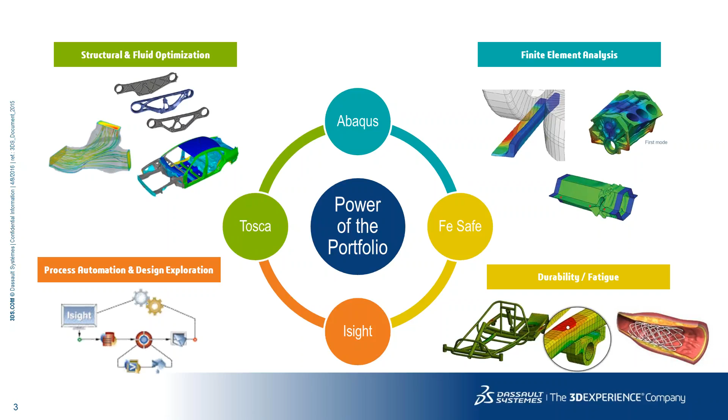Tosca is a non-parametric tool, whereas Isight is a parametric tool used for design of experiments or optimization. Next I'll go into the workflow where you can use all these products in combination with each other.

The way the project is designed: first, stent analysis is performed in our flagship product, Abaqus. Once we have the initial stress results, we start looking into parametric design optimization using Isight.

Where we can change the parameters. The known parameters are length, radiuses, thicknesses, and so on. We can change them, and then once that is performed, the next step is to go into fatigue life, because whatever product we design or analyze, we want to make sure it has enough life in it, like hours, years, or maybe seconds, loads, or cycles.

That can be developed using Fe-Safe, and then eventually taking the same stent to the next level, doing local optimization using a product called Tosca. So far I've talked about Abaqus, Isight, Fe-Safe, and Tosca.

We also want to make sure that once we've designed our stent and it's good enough, we can take it to the next level or into production, where we can do reliability analysis using Isight. This is all a very broad overview - I'm not going to get into the nuts and bolts or details, but just to show you how things work, and then eventually we can look into particular products like Abaqus.

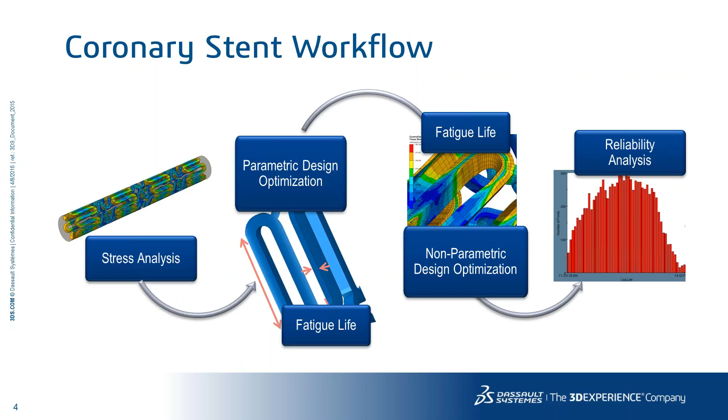Stent deployment analysis: as we all must be doing, if you're using Pro Mechanica, you'll be doing some sort of stress analysis, maybe static, or dynamic, linear or nonlinear, depending on requirements. Here we're doing crimping and insertion analysis using Abaqus.

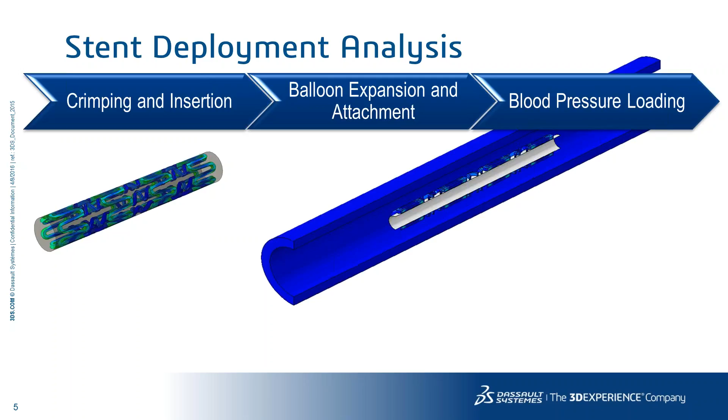Then taking it to the next level where we put it into the artery. First crimping it, then expanding the same stent into the artery, and eventually loading it with blood pressure, basically ballooning it. This is all using Abaqus.

We've performed the crimping and insertion analysis into the stent, and then life can be influenced well by a small shape change in it. That can be performed using Tosca.

Extending with global design changes, which we will go into changing with the Isight parameters, where we change the radiuses and length, and then eventually run the cyclic stress or fatigue life, or any durability analysis using the Fe-Safe code.

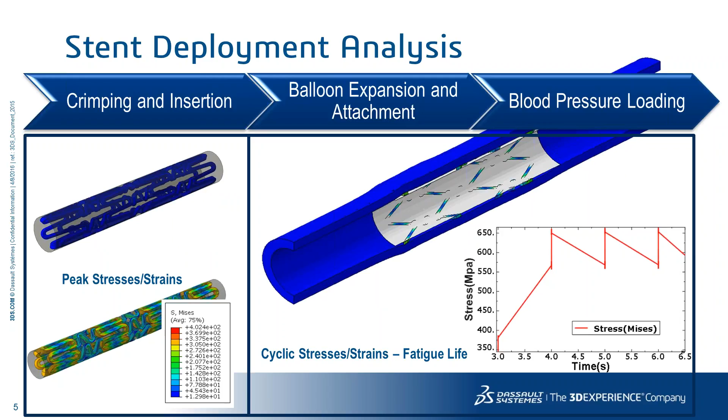Once we did the life cycle analysis, which can be done at any state of the analysis - we can go into the crimping or we can go into the expansion - that is where we can design that.

Now going into the parametric aspect of it. You must have used some kind of parametric study whenever you design a part - what if I change the radius, or what if I change the length? Will I get better performance, or will I get worse performance?

So we've all done the iterative study or trial and error study, which can be made into an automated process using Isight. Control via geometric parameters using SolidWorks.

In this particular case, the part is designed using SolidWorks, so changes on the mesh are transferred with the help of a script, if you're using any scripting. The workflow here: start with the parametric 2D model, bring that model into Abaqus CAE, mesh it, and then simply extrude it, because this is a simple extrusion part - extrude it, make it 3D, make it a cylinder form, and eventually run the analysis.

For this particular stent analysis, there are three parameters that can be investigated: first is length, second is thickness, and third is radius. First we can set up a design of experiment using Isight, and that will automatically modify any of the parameters.

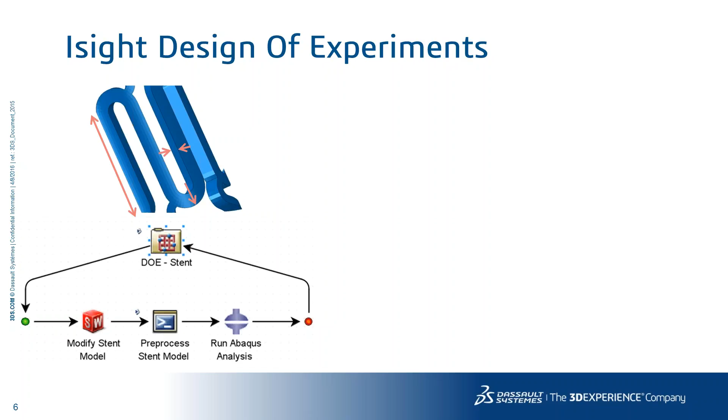In other words, we'd be doing one study, running the analysis manually, finding the results, then going into the next analysis, maybe putting an Excel sheet together saying these are my high stresses, these are my high strains or displacements, whatever variable we're looking at. That's a tedious, iterative process, but with Isight you can automate everything, and that's where process automation comes into play.

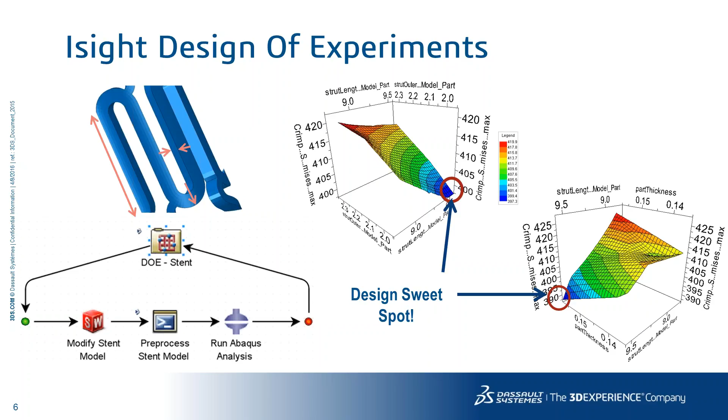Eventually my goal is to reduce the stresses. That's where the sweet spot comes into it, including all the parameters, and that's where Isight guides us into the right direction. This was more of a global approach going into the Isight design exploration.

Now I can go ahead and make some very local changes using shape optimization with Tosca. So far I showed you the capability of Abaqus where we did the crimping or expansion analysis, then the life cycle analysis using FE-SAFE for fatigue and durability, then the parametric study for the global model where we changed all the parameters in the part, and that's where we found the best possible solution.

Now I want to take it to the next level, where I can still reduce my stresses by going into stress homogenization and peak reduction.

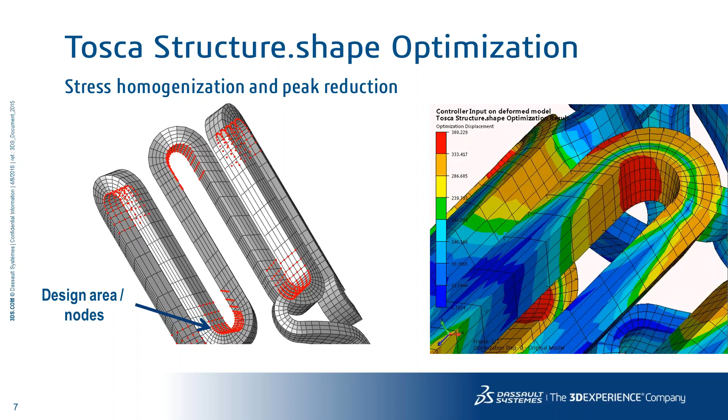The best part about Tosca is you can put geometric restrictions, because sometimes it will come up with a design which cannot be manufacturable. So you can put restrictions into it as well, and you can also put cyclic symmetry.

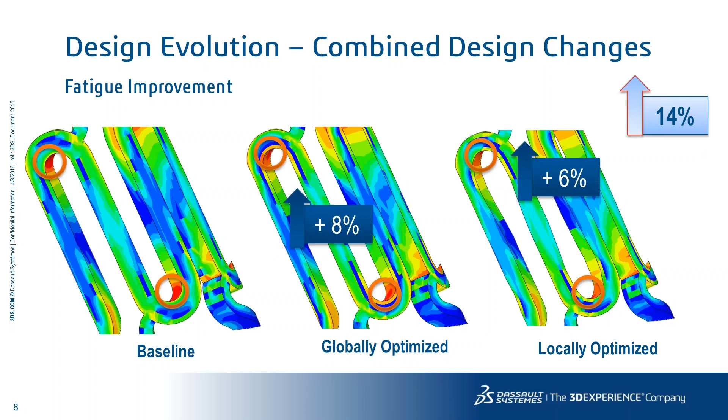I just showed you a very high-level analysis aspect of it. What I'm going to do now is go into the nuts and bolts of Abaqus analysis, because that's the whole purpose of this webinar - to show you the capabilities of what Abaqus can do. Those are limitless capabilities, and the industries using it - any industry you can imagine - Abaqus is being used nowadays.

So I'm going to start with Abaqus and what you can do. As you remember from the first slide, it talked about realistic simulation. So what is realistic simulation? It's nothing but a simulation that can be physically realistic and lifelike. I've worked in the industry for about 15 plus years, and the sophistication it has come across with contact, material definition, and all sorts of loading capabilities and analysis procedures - it's a tremendous change.

So all companies are moving in the direction of virtual validation, and you must have heard that, because Honda is a great example - going from a product life cycle of 5 to 6 years, just taking that as a number, nothing solid, but maybe reducing it by months. So that's where every company is going - not to eliminate physical testing, but at least reduce the possibility of it.

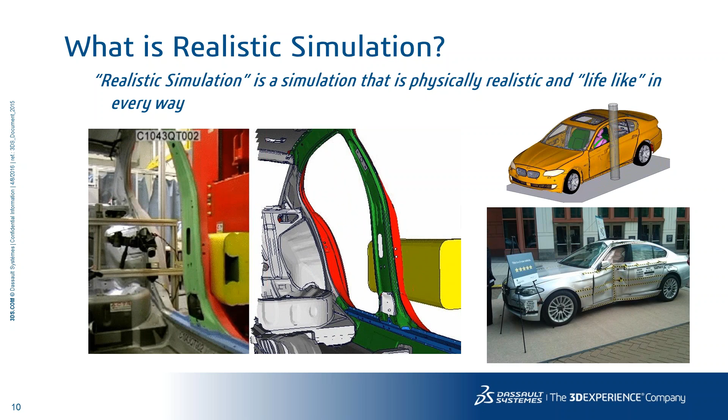Here is another one: to reduce the physical testing, because as I mentioned, every time a prototype can cost you tons of money. So to reduce physical testing, save time and money in the product life cycle, and eventually improve the quality.

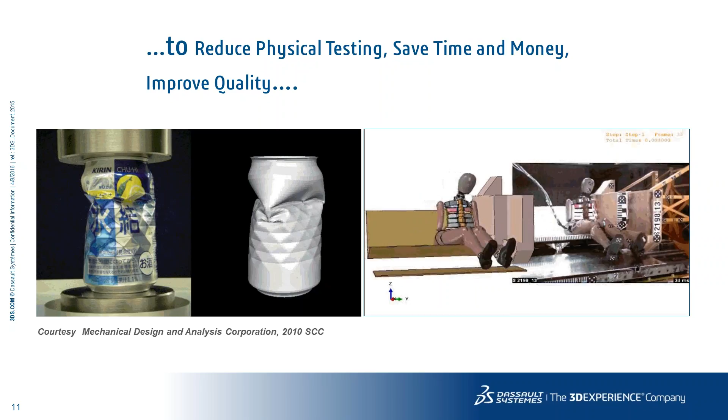Another example is the dummy for the side impact analysis, and that compares very well too. So these are, as I mentioned, kind of a proven process in the industry where they have eliminated the prototype phase and gone directly into production.

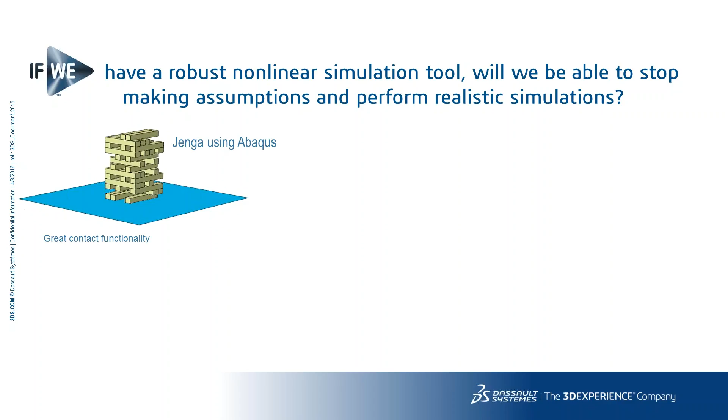So here is the first one, known to every household: Jenga using Abaqus. It's a great demonstration of contact functionality.

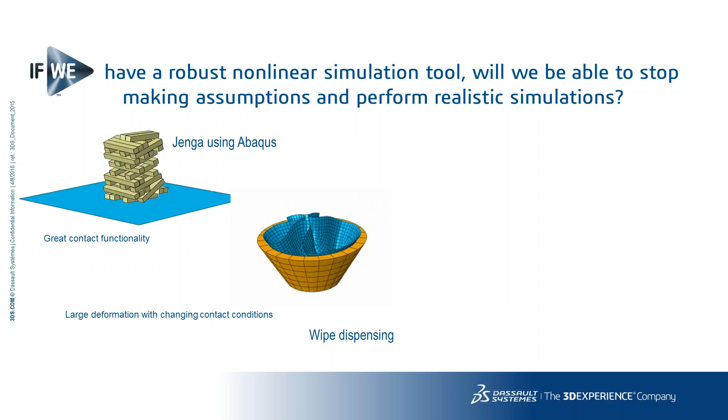Then here is another one we've all used at one point in time: the wipe dispensing for our Kleenex or any Lysol wipes. This shows how the contact state changes as the wipe is being pulled out of the container.

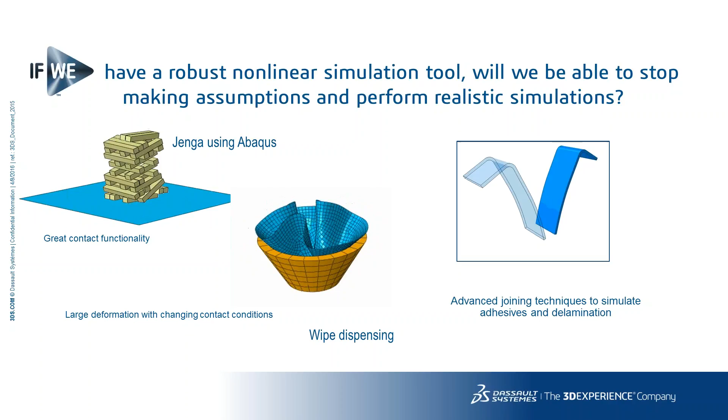And then here is the delamination, or finding the adhesive or cracking in part of it. This is the VCCT, or virtual crack closure technique, in the Abaqus software.

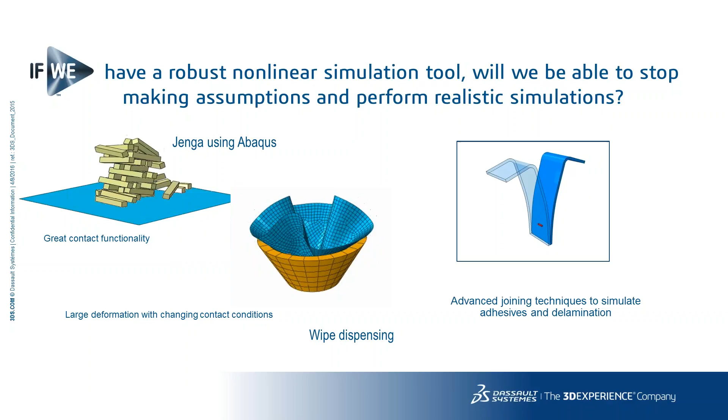So these are some advanced capabilities available within Abaqus. You might not be using them nowadays, but eventually you can take it to the next level and use them.

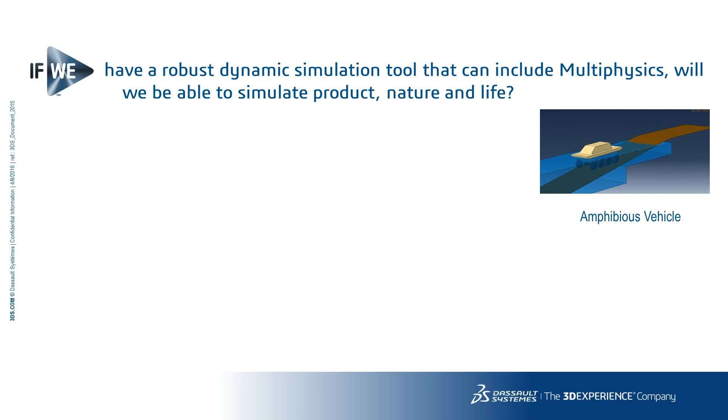So that is where the vehicle here is kind of a duck boat tour, which we might have seen at any tourist place, like Wisconsin Dells or Boston, anywhere. So that's on the road, and eventually getting into the water, and analysis has been performed on it.

And here is the Heart Project. Simulia is very much into it, and right now we have a Living Heart Project. So if you want to see a very cool simulation, you can Google Living Heart Project, Simulia Abaqus, and that way you'll be able to see all the details of it.

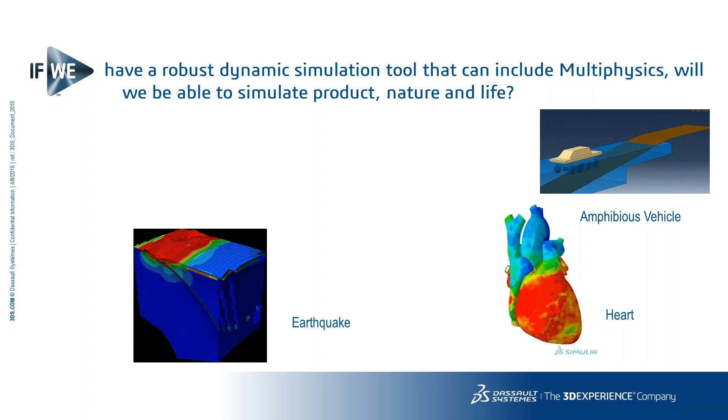And then earthquake simulation. This is a better one, like a hose with fluid, using our SPH, or smooth particle hydrodynamics, simulation capability within the Abaqus tool.

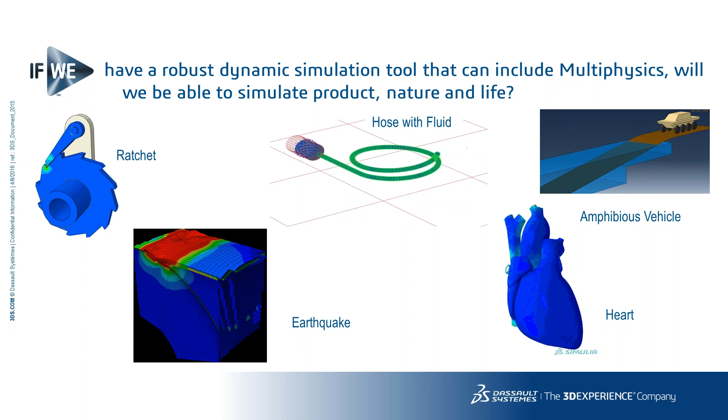So that's showing that. And then here is a simple ratchet mechanism where it stops, and high stresses and high strains are generated, eventually causing permanent deformation. That's where the tooth fails.

Here is a clip insertion analysis, more of a bushing simulation. And then the stent we just saw, taking it to the next level where we saw the delamination or adhesive properties. This is a great example from the aerospace industry.

That's where the skins, stringers, and longerons are all simulated, and that's the good old flagship simulation. If you go to any Abaqus demo, that's the first simulation, and that's where the explicit analysis started, with the Motorola phone drop simulation.

And this has expert capabilities within it, using the CEL, or the combined Eulerian and Lagrangian capabilities, or the coupled thermal mechanical analysis, and composite delamination technology. So these are the various simulations that can be performed.

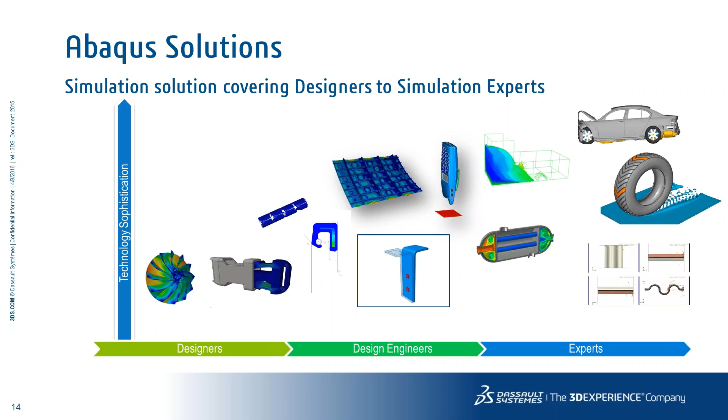So that's enough with the animations and videos of Abaqus capabilities. Now I'm going to talk about what industries it's being used in, and tell you a little more about Abaqus, the solvers and the products.

Now I'm going to get into the details of the Abaqus products. Abaqus comes with Abaqus Standard, which is our implicit solver. Then we have the explicit solver, and computational fluid dynamics, which is CFD. It's mostly nonlinear engineering capabilities designed for production use. The mathematical basis is the finite element method, with years of experience behind it, which is why it's an industry standard.

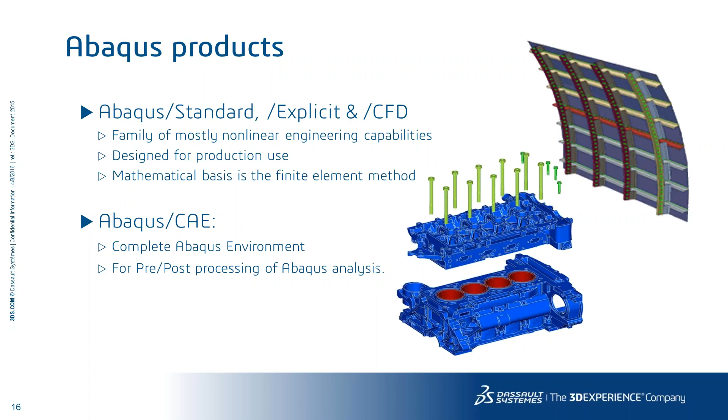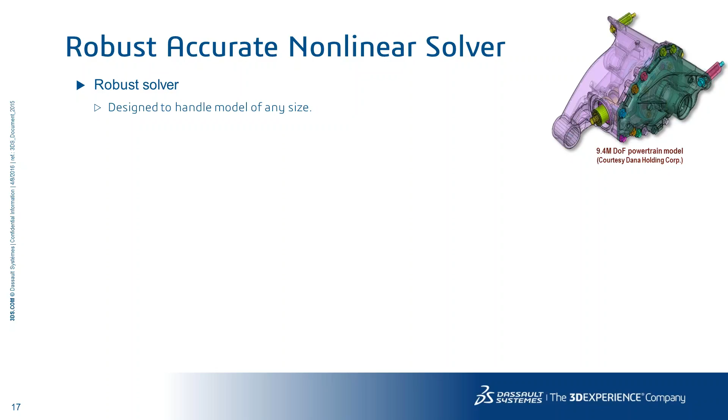Here's a simple example from Dana Holding Corporation: a 9.4 million degree of freedom model, which is huge. It would take 3 days if run on 4 cores, but running the same model using 128 cores, the solve time was about 4 hours rather than 3 days. So you can see it marches to the solution faster and scales efficiently when using multiple cores.

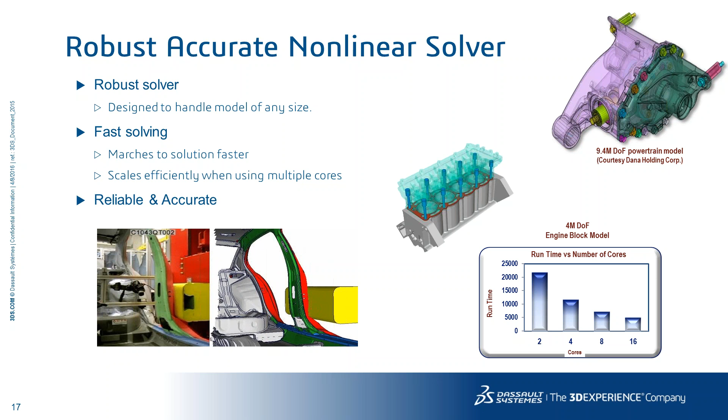Here's a 4 million degree of freedom model, where runtime with 2 CPUs versus 16 CPUs was almost a quarter. As we saw with the impact analysis, that's the scalability portion of it—more CPUs get you results faster. It scales pretty well with respect to the resources and tokens you have.

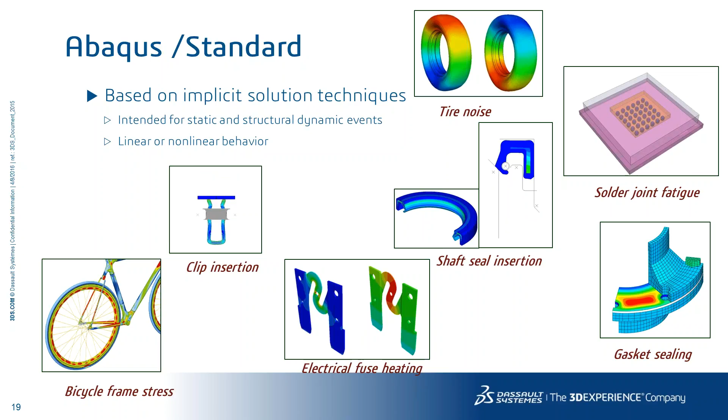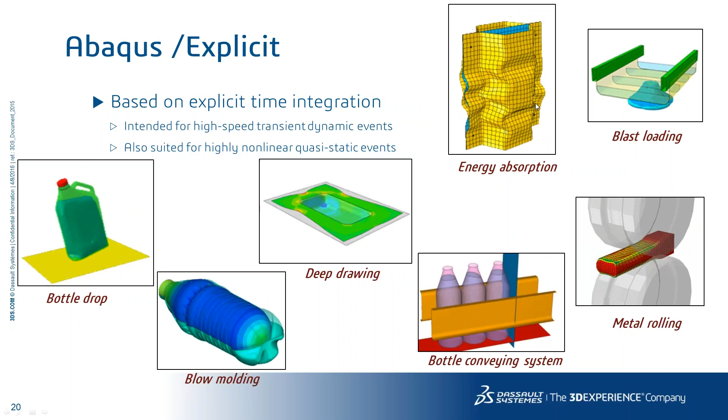And then explicit, that is where you can take it to the next level where high-speed transient dynamics is an area of interest. It's also suited for highly nonlinear quasi-static events. So if you're doing a bottle drop analysis, this also takes into account fluid structure interaction, or FSI, then blow molding, deep drawing, energy absorption like the previous crumpling of the beam, blast loading, metal rolling. These are just a few examples, and you can also use it for contact simulation, which is extremely robust and accurate as well.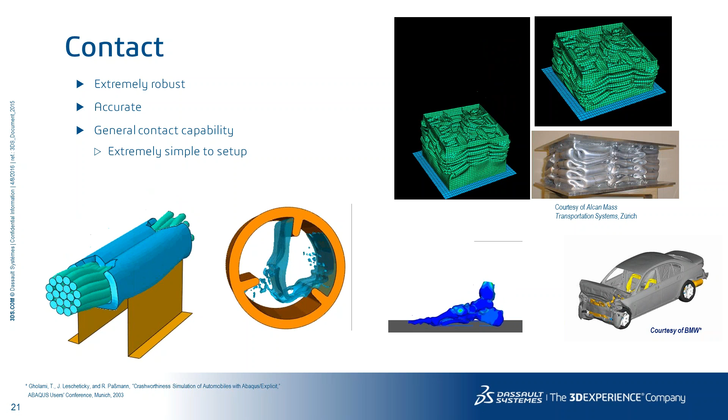So just to sum it up, Abaqus does a great job with the nonlinear models, or if you just have a basic analysis, where I'm going to show you the demo of it into the beam simulation, but contact is now the area of interest.

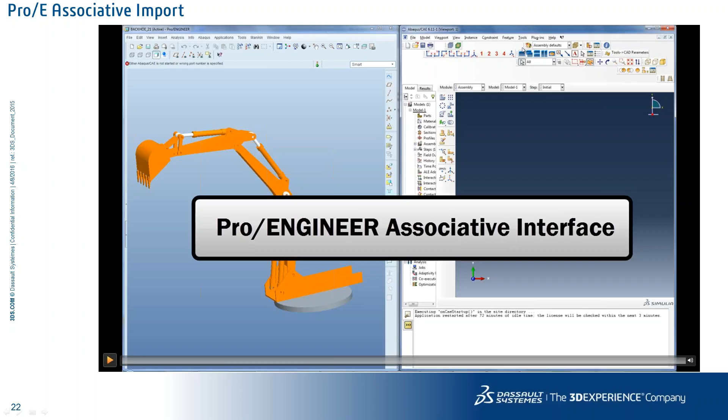So I'm going to show you the associative interface import with Abaqus. Here is my Abaqus CAE and here is my ProE, and I'm going to show you the associative import into it. First of all, to start with, I have to make a connection with my CAD interface. In this case, I'm making a connection with my ProEngineer.

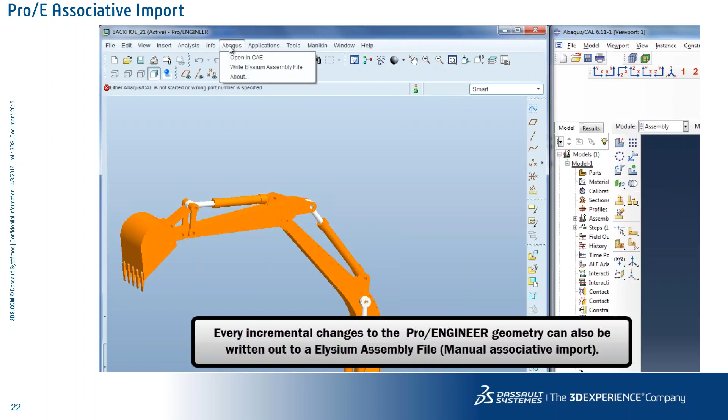So that way, ProEngineer associative interface offers two import methods: one is automatic, the other is manual. Automatic is open in CAE, and manual is exporting with the Elysium assembly file. Every incremental change in ProE can also be written to the Elysium assembly file, or manual associative import.

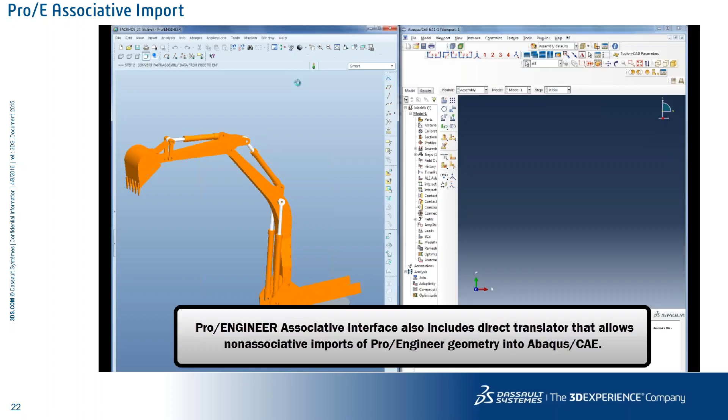So now in this case, I want to do the automatic, so I'm going to be exporting that to Abaqus. What do I want to export? The solids and points and everything, and what units do I want to write into it. So now I have all the details, how many solids I'm importing or how many points I'm importing, and then putting that into Abaqus CAE.

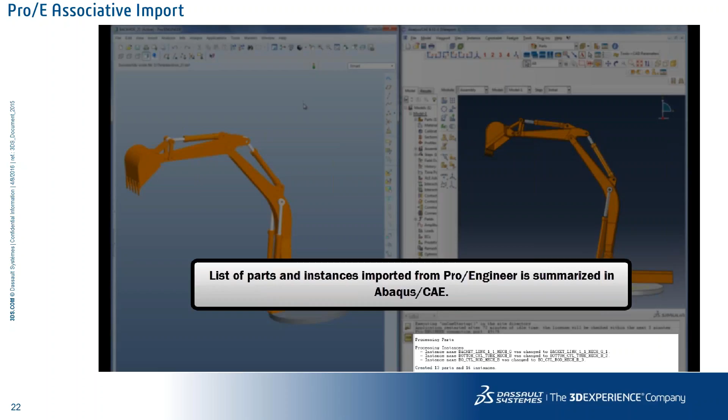The only criteria is that you have to have both the GUIs open, so you can see how simple it is. I brought it in, and now I have all the part instances into the assembly the same way as I defined in ProE. The naming convention stays the same, and I can also do view manipulation, because pan, zoom, rotate is not the same with ProE, since it does go with CATIA.

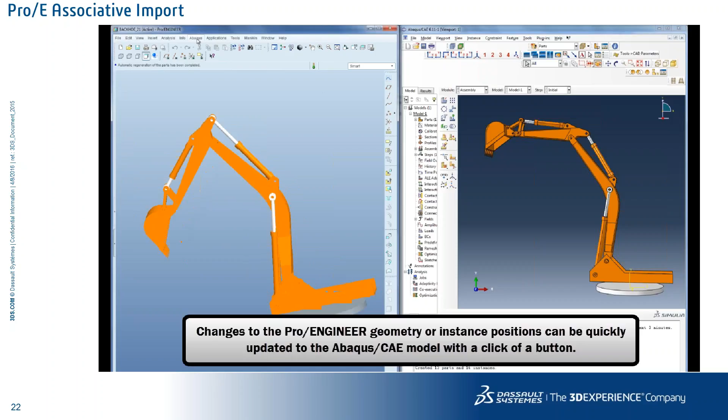Now I want to make some changes in the ProE aspect, so you can just see on the fly I moved my backhoe. Now if I update the model, the only other thing to keep in mind is every time you make a change, you need to open that into CAE again, and everything will be replicated the way it is in your ProE model.

So now I'm going to be creating a step where I want to perform a static structural analysis, or linear analysis. I'll perform that and create some kind of sets, loadings, and boundary conditions, and that will still be retained even if I made changes. So I created a step within Abaqus CAE, and then I'm going to go ahead and create a loading onto the side face with the pressure loading.

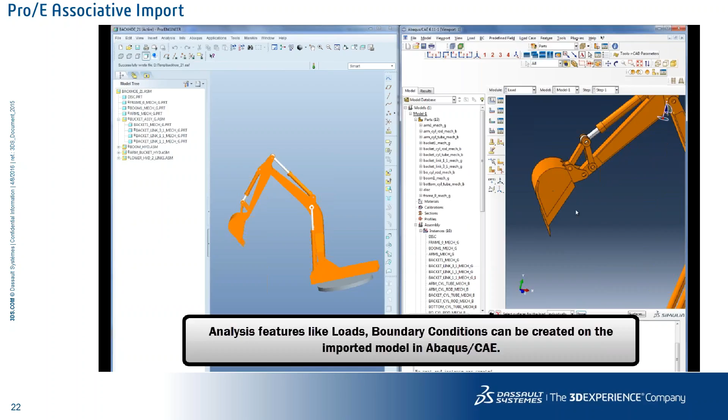So that all can be created in here. I created a pressure loading, and then I'm going to create a surface and a set because I want to apply some kind of a boundary condition. So I'm going to create a set with this surface, using one of the curvature surfaces.

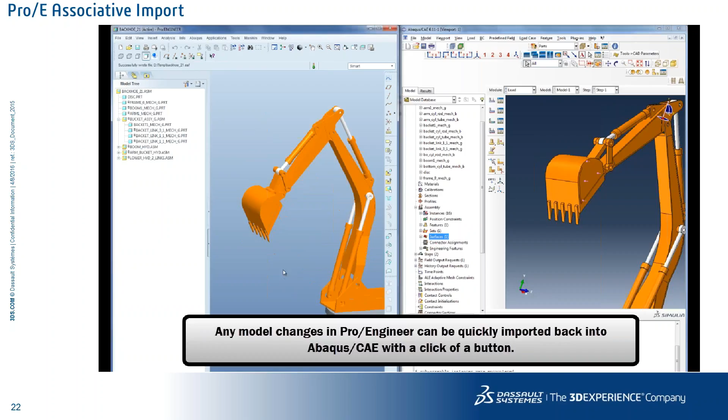So now I want to take it to the next level. I was like, whatever design I have for my backhoe, I want to change it. I want to change the dimension. So I changed the part dimensions or the parameters.

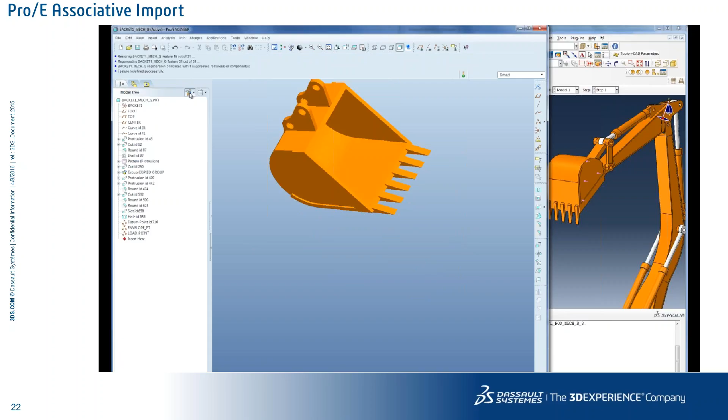So just wait for it, but you'll see the wonders. The same change is being implemented into your Abaqus CAE as soon as you open that again into the CAE. And I have some suppressed feature into the part, which was the hole I created beforehand. That is also defined into it. So now I go back to my assembly into Pro E.

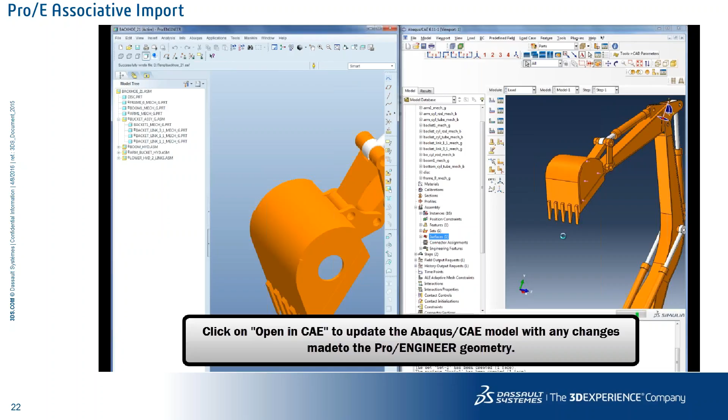So those changes are implemented, but I still don't see it. So I need to go into the Open in CAE. That way the changes are implemented. So you can see that my backhoe became smaller, and also there is a hole onto it. But wait until you see the loads which were defined on the surface, they still remain intact.

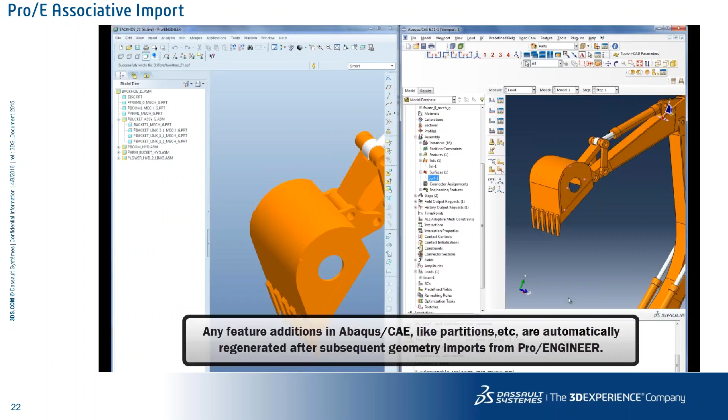So in a way, when you want to make some changes into Pro E, this is kind of an added capability. You have to have a license for the associative interface. But I just wanted to show you, because the way you make changes into your Pro E or into your Abaqus, those get replicated into your Abaqus CAE model. Because most of the time for us analysts or design engineers, what happens is you make some changes and you have to go ahead and recreate that model because that change isn't implemented into the current model.

And the same way, the SolidWorks associative interface is also available, which can work in pretty much the same aspect as well. So I just wanted to show you that, because as I heard, some of the Pro E design engineers are also going to be part of this webinar.

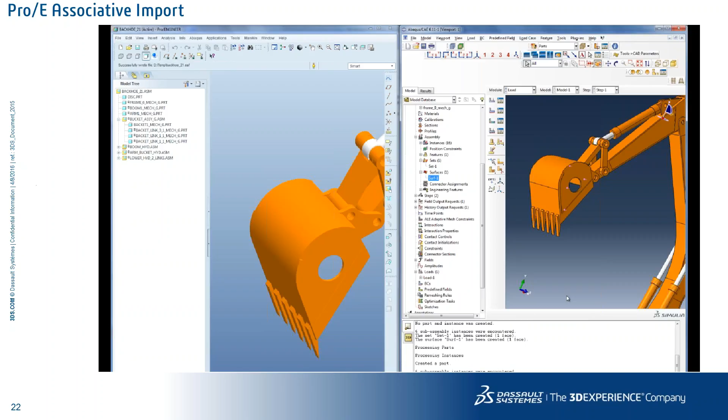And now I'm going to take it to the Power of the Portfolio, or the other tools which can be used in conjunction with Abaqus CAE.

So Tosca is a known tool for non-parametric optimization. And within Tosca, there are various modules available. The first one, and the most used, is the topology module, because every time you work on a part you ask: how can I make this part lighter?

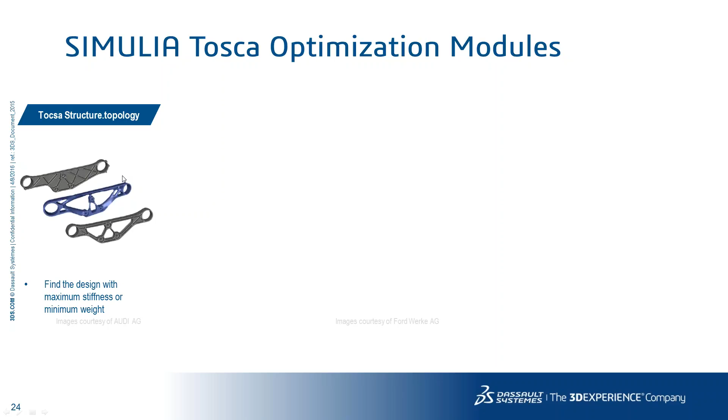How can I make it cheaper? Because material savings is your cost savings eventually. So you find the design with the maximum stiffness or minimum weight, so you're not compromising on the quality of your part, but at least you're getting minimum weight.

Then the second module within Tosca is sizing, where you can reduce the mass through optimized sheet thicknesses or sheet metal thicknesses. So as the name says, sizing works for shell or sheet metal components.

Then there is shape optimization. This comes into the later part of the design. Shape optimization doesn't help you with a whole lot of material or cost savings, but it does help you big time with local stress reduction, or in other words, hotspots or high stresses. So that can be reduced.

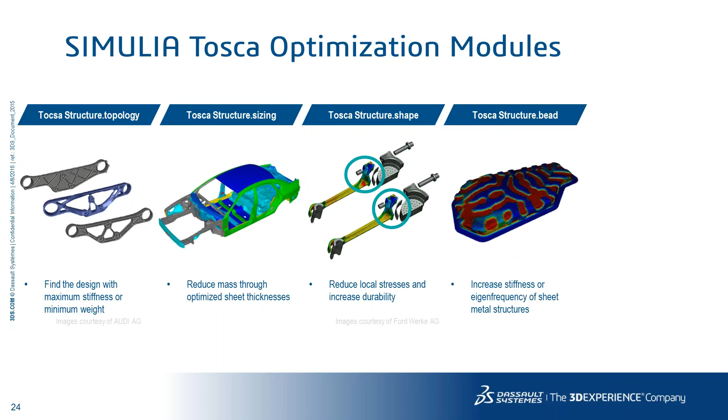And then there is bead optimization, mainly used for shell components or sheet metal, where you can add beads into it, or Tosca will add the beads, and increase the stiffness, or help you get higher normal modes.

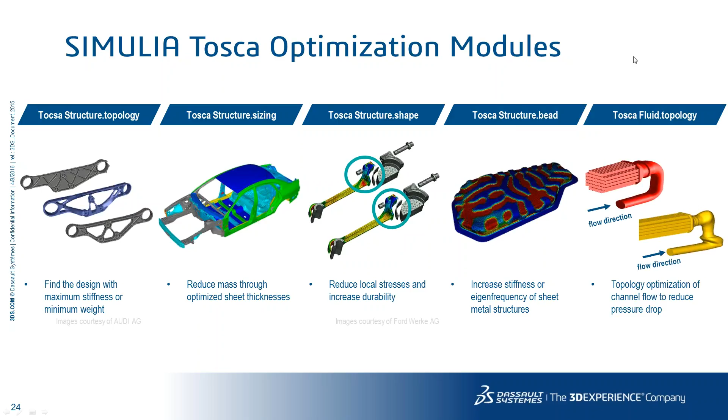And the last one is fluid topology. So if you want to do fluid flow analysis, then fluid topology will be the module you use. And then here is a simple example.

So this was the original design. I started with the design space. Design space is nothing but the confined volume, how much of the design space is available for you to sculpt a part out of the component. So the topology optimization, and then eventually you can extract the geometry into IGES or STEP, and this is where the final design comes into it, because we always want the part to be manufacturable.

So that can be defined into it. And then FE-Safe is another tool in the portfolio which can be used for fatigue and durability analysis.

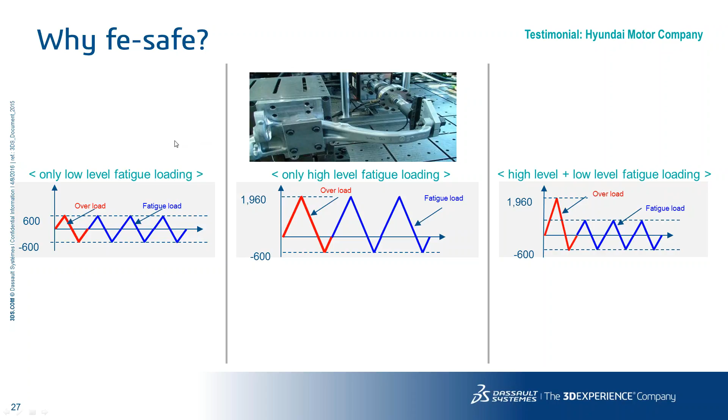If you are just designing your part for low-level fatigue cycle, the known source of failure, known location of failure, is going to be around the bolt hole. If you are dealing with high-level fatigue loading, it's going to be around the bolt holes or bolt loading. But now I want to get accurate results on my residual stresses, where I'm going to be combining low cycle and high cycle fatigue into the nonlinear aspect of it.

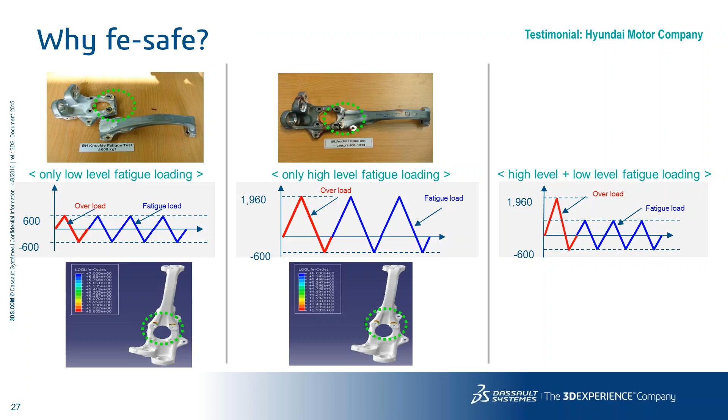And there you can see that it's not predictable. So this is where pretty much every kind of failure happens, because your part is not always going to go through low cycle fatigue or high cycle fatigue, but it's going to be a combination of both. And that is where FE-Safe will help guide the part design.

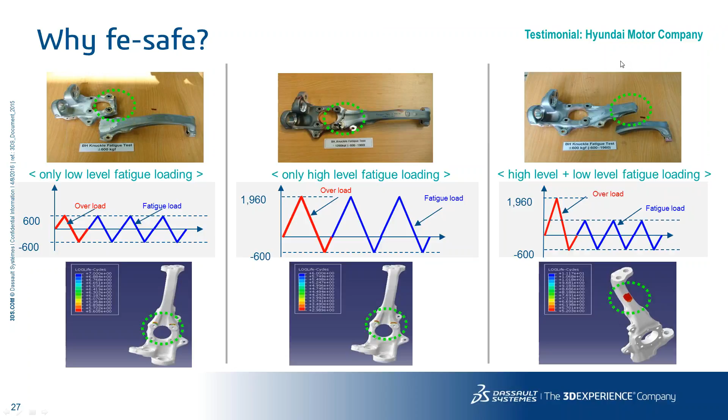So this was an example from Hyundai Motor Company. This is a live example. And here is Isight, which is being used for the process automation.

So Baker Hughes, we all have heard the name, which is a big manufacturer for tooling for oil or gas companies. So they were using a manual iterative process where they'll go ahead and change the dimensions, or change the diameter, or change the length of it.

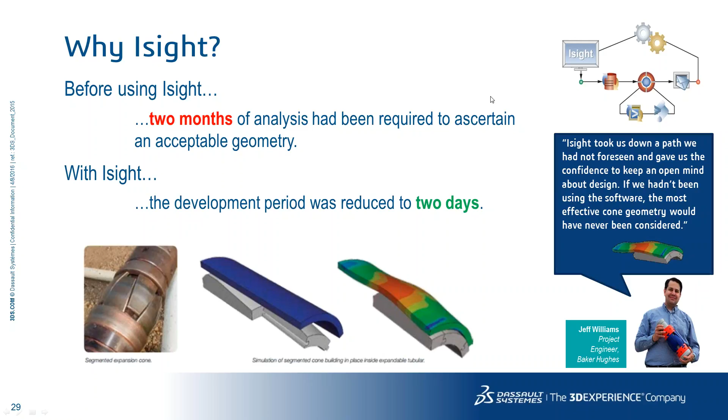So 2 months of analysis had been required to ascertain the acceptable geometry. With Isight, they did it in 2 days, and this is the real testimonial where they were able to go from months to days. And the best part was, they had never thought about how the part could be designed, but with Isight, they went ahead and found a brand new domain in analysis and process integration, or design optimization.

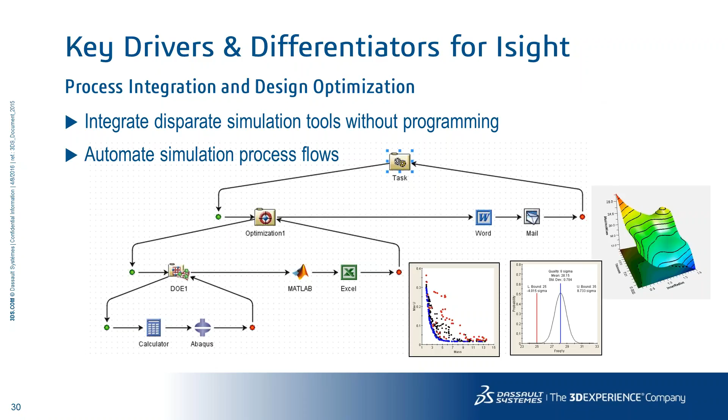So the good part about Isight, as I mentioned, is it works across products, so you can do reporting, you can use design of experiments, you can use Abaqus, you can use MATLAB, and it doesn't always have to be Abaqus only. You can put in any component whichever is supported, and then automate the simulation process flow. So that is the power of the portfolio for analysis.

And I think we have some time left. So what I'm going to do, since you are not the current Abaqus user, I'm going to bring up Abaqus CAE, and I'm going to show you how simple it is to create a model, at least just to make you familiar with the GUI or the interface.

So let me just bring this up, I have a dual monitor. So I'm just going to bring up Abaqus CAE. So Abaqus CAE works on a module base, so part, property, assembly, and I'm going to go through each module. So first, I can go ahead and create a simple part.

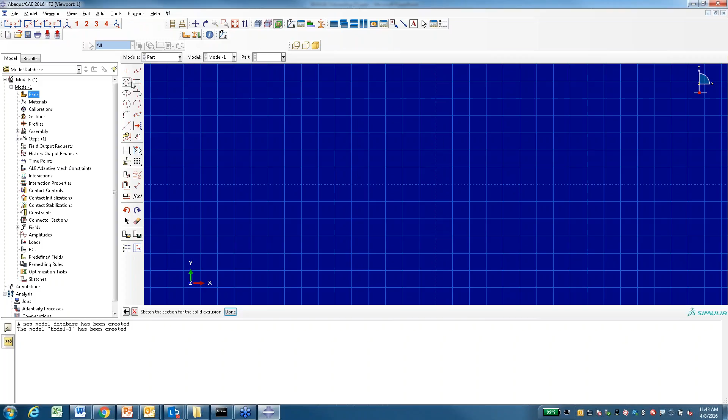So I'm going to go ahead and create a solid beam, and we start with a 2D sketch, and then I'm going to give the extrusion depth. So here is my beam. I'm going to make it a 3D beam. So I've created a part.

Now I'm going to go into the material module. As I mentioned, here you can add all sorts of materials. So I'm going to make it very simple: 210e3 and Poisson's ratio of 0.3. So that's my material. I'm going to name it steel. So that's my material.

I'm going to go create a solid section, and then assign that section to the part, set 1. So here is my part with the property. Abaqus has a requirement of having an assembly. So I created an assembly, and now I'm going to go create a static step.

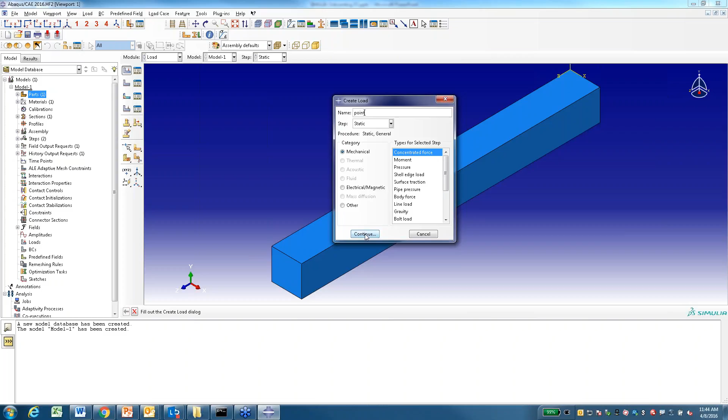And then I'm going to go create a load, a point load onto it, a concentrated force. That should be okay. What points? So 1, 2, 3, and 4. And then I'm going to give the force of -50 into the 2 direction.

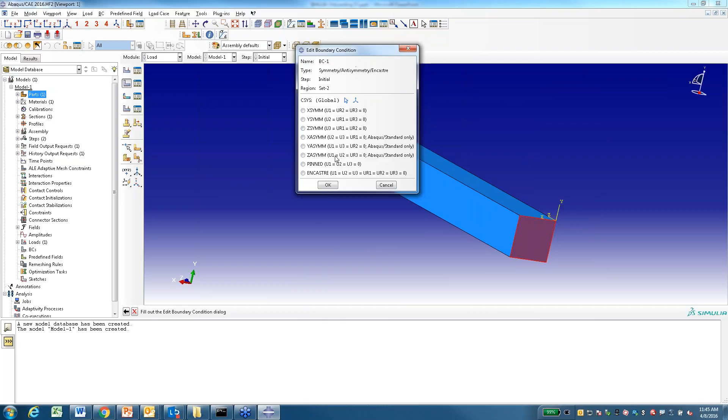So now my part is being pulled downwards onto one side, and on the other side I'm going to create the boundary condition. So that is on this particular face. I'm going to create the boundary condition where I'm going to make it a pinned condition, and then create the mesh into it.

The size of 3, and then simply mesh the part. So here I have everything required to run the job, which I did - the part, property, material, assembly, loading, boundary conditions - and I'm just going to be running this model.

And I can do everything within Abaqus CAE. So that is where kind of a parallelization comes in. If I have 4 CPUs on my machine, I'm going to use that, submit the job, and I'm going to get results into it.

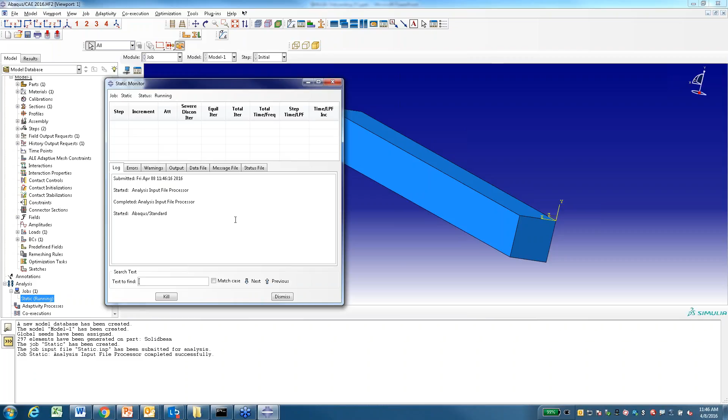So the job is done because it was a very simple analysis. I'm going to bring in the results. So it will bring me into the viewer, and that is my cantilever beam analysis. So that's my stresses, and this is my displacement into it.

So I just wanted to show you how Abaqus in general, depending on the multiple components and multiple things, you'll be making it a little bit more complicated into it. But I think that's about it for me to show you.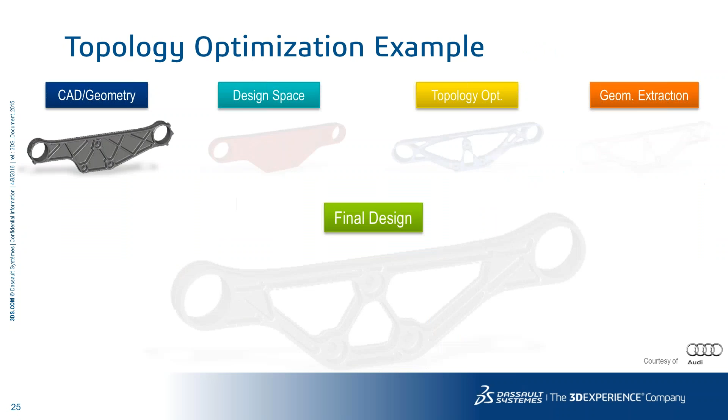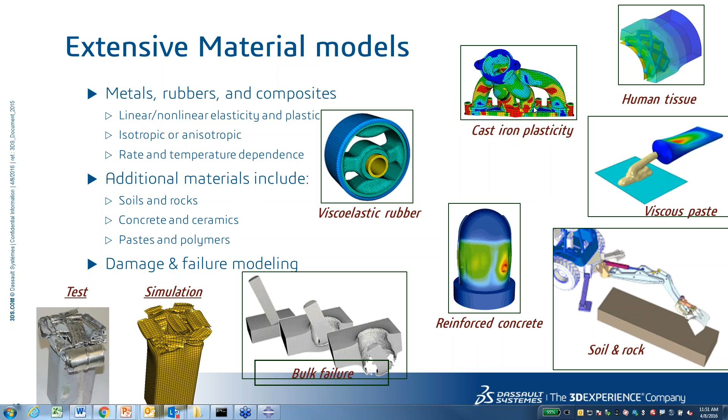Yes, we have couple of thermal structural simulation aspects. If I go back here, this is the coupled thermal analysis for the manifold for the engine. Now I wanted to look at the thermal aspect, taking into account plasticity, so that's being used into it. And then there's another example for wave loading, thermal analysis, and structural analysis. So yes, it's been used widely in the industries.

Excellent, excellent, these are good questions. I think it's a very widely used, capable software. Abaqus can do wonders.

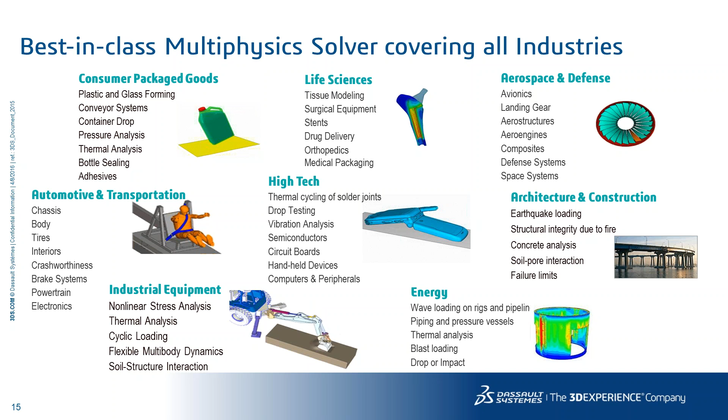That's perfect, excellent. Actually, one more question came in: we are a tier 2 supplier to an automotive company that uses unique materials. Can those unique materials be loaded into Abaqus for structural analysis? Yes, we have a very wide materials database.

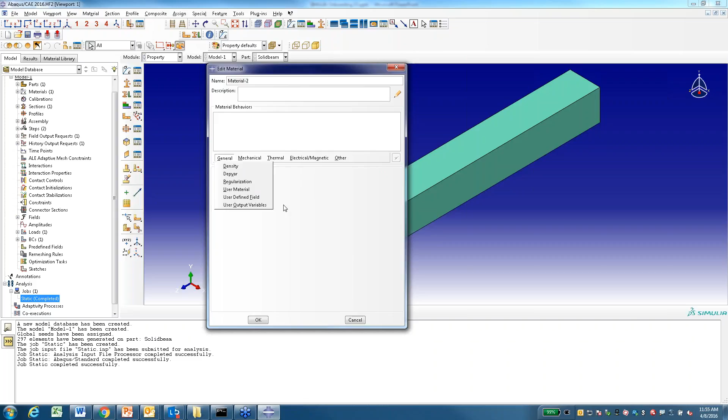Let me just show you what can be included. Can you see my screen, Rob? Yes, I see your screen. Okay, so into the material definition we can put all sorts of materials, and if it's very specific, there's a feature within Abaqus called the user subroutine, where you can write your own materials and bring them into Abaqus. So this covers mechanical, thermal, electric, magnetic, and you can also use gasket material if you're a gasket manufacturer. So all sorts of user material can be defined and brought into it. Abaqus does support all sorts of materials—whatever can be written out can be brought into Abaqus, yes.